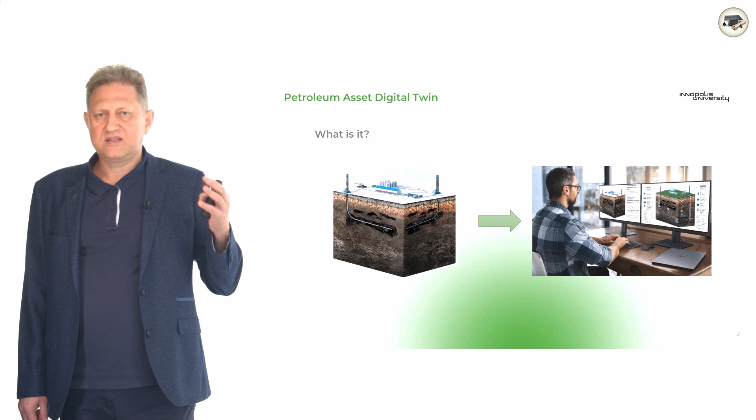So as you can see from that picture, the picture to the left shows you a kind of a screenshot of what happens in real life, whereas to the right you see a person sitting at the computer monitor and watching the representation or a mirror of what happens in real life. And that's what we call a digital twin. And what are the components of the digital twin? The pieces of the software which we have to build in order to create that integrated facility.

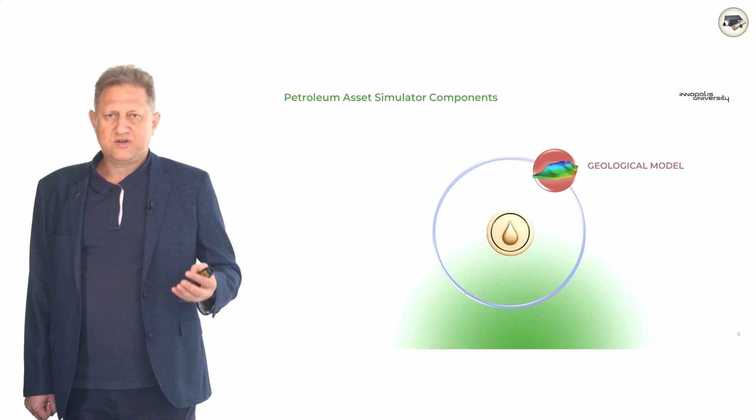And the first component obviously is the geological model of the reserves, how they have been created, matured, and located in that place. And then we go to the dynamic flow model, because if you want to recover these reserves, you have to force the fluid to flow from the pore area into the wells. And then you go to the well model. You have to model the way the fluid moves through the well, whether it's up from the subsurface to the surface, or sometimes petroleum engineers do the injection of gas and water back into the reservoir.

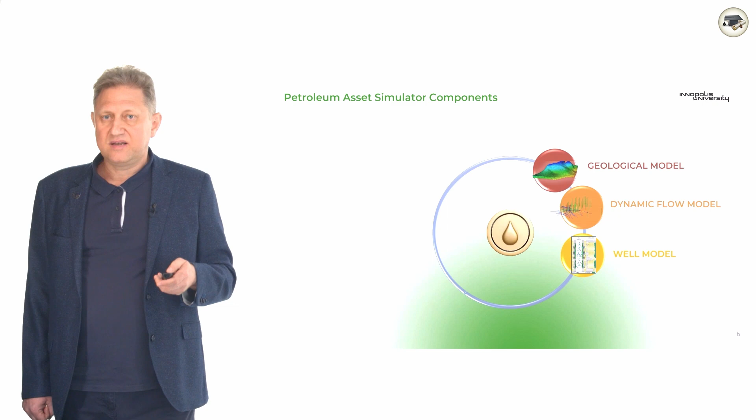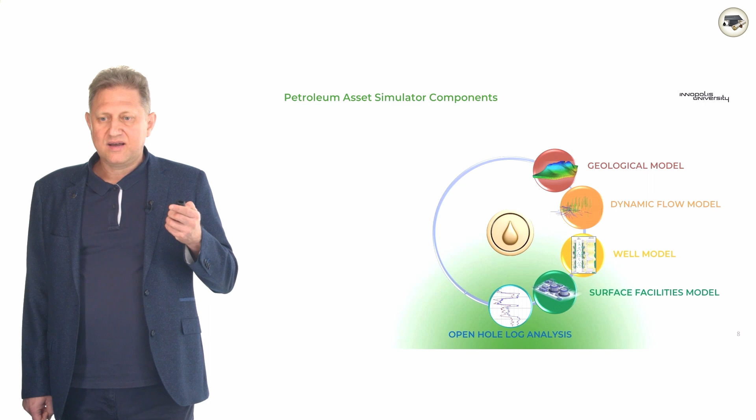And the next one is the surface facilities, which, as suggested by the name, stay on the surface and transport the fluids, water, oil, and gas towards the processing plants. And when you run that business in petroleum industry, you have to start retrieving the data about the rocks, about the wells, about the surface facilities. You definitely go for the surveillance. And one of the key surveillance methods in petroleum industry is the open hole log analysis, and that component should be put into the computer space as well.

And once you already have the wells, and you understand the rocks to some extent, you have to start understanding the performance of the well itself. The wells, just like people, tend to be misbehaving. They have integrity issues, they have performance issues, and you have to run the surveillance to understand what's going on with this well. And that has to become a part of the digital asset as well. So that's called a cased hole log analysis.

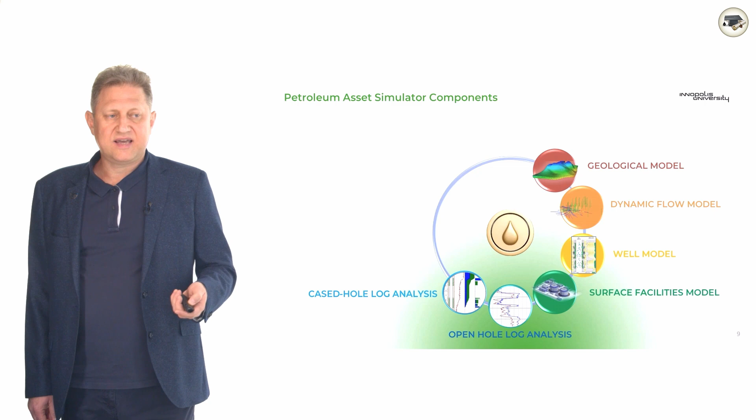The other popular surveillance in the petroleum industry is the pressure and rate transient analysis, where people analyze how the production is changing over time and how it relates to the changes of the pressure over time. So those two constitute what is called a pressure rate transient analysis, a very important surveillance mechanism to understand the reservoir and well behavior.

The other component of any digital twin, not only the petroleum assets, but basically any digital twin, at least those who try to mirror the business processes, is the economics, which includes the ins and outs. And we're going to talk about this a little bit later.

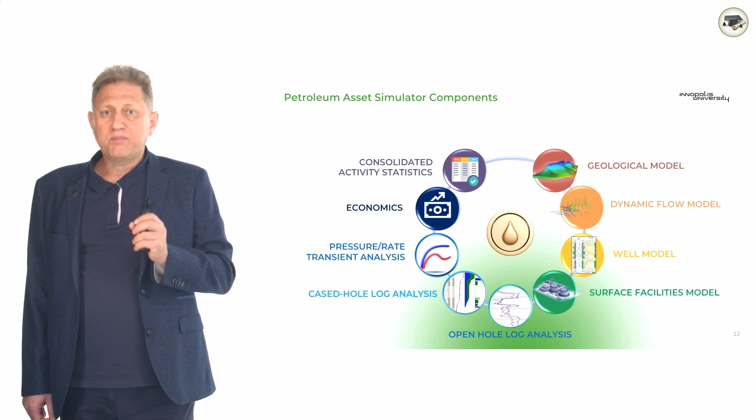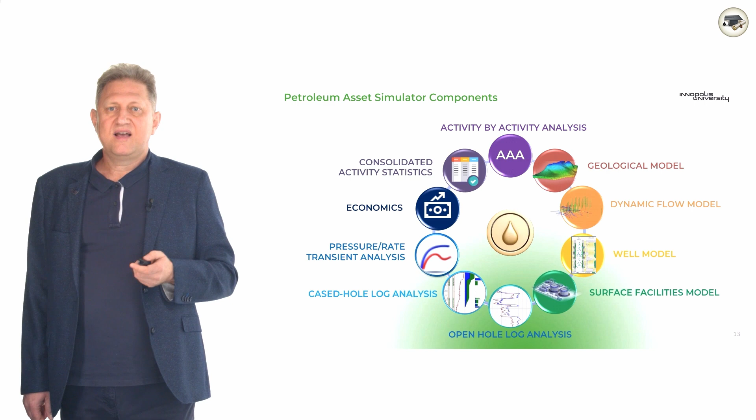The other component of the digital twins is consolidated statistics. So the robots today keep tracking what's going on, and they bring the numbers to the screen so that people can analyze these numbers and understand what's going on. And this kind of monitoring statistics is normally split into two categories. One is the consolidated, just the numbers, and the other one is something which has a visual representation, like graphs or maps, and that one we call the activity by activity analysis. So those components are constituent parts of the digital twin.

Now let's go see very briefly what's inside. Well, definitely, we don't have enough time to go into the foundations of petroleum engineering. That's going to take hours, if not days, if not weeks. But what we're going to do here is show you the pictures, the images which are associated with the components I just previously described. So when you say geological model, we normally see the cross sections of the different subsurface stratums. We see the maps. That's what we say the geological model is.

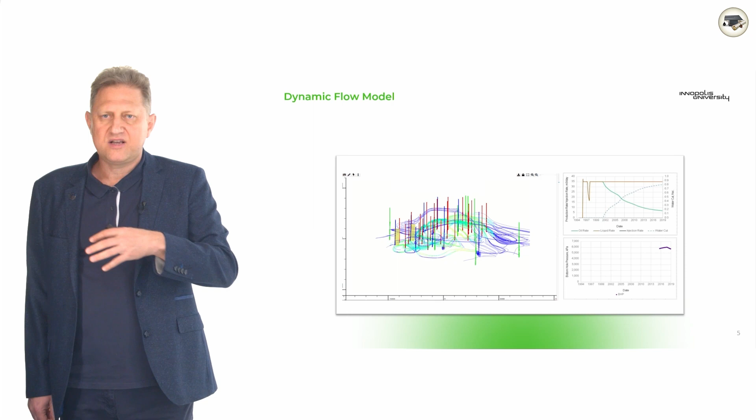The other one is the dynamic flow model, and what we see is the streamlines of fluid, which is moving from one area of the 3D reservoir towards the wells, or away from the wells if this is an injecting well. And the other one is the well model. What is the picture associated with the well model? It's a hole in the ground and a pipe within the hole, and we can see that there is a perforation which connects the well with the reservoir, and we can see the fluids, in this particular case pictured like bubbles. They're moving either from the reservoir through the perforations into the well and then lifting up, or they are moving down because we pump them from the surface and want them to get into the reservoir.

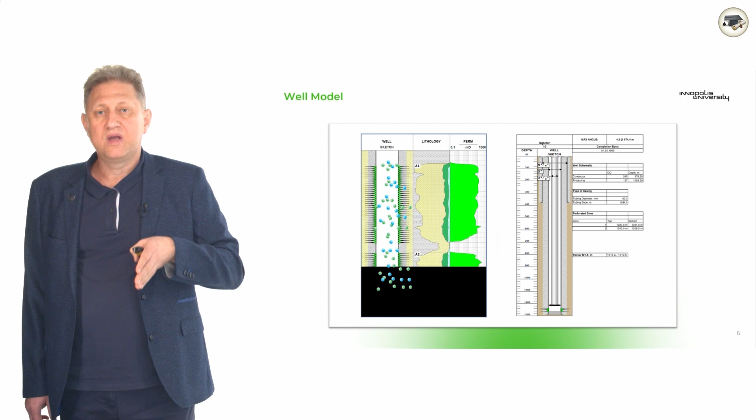The other one is the surface facility model, and it's easier to comprehend for the majority of people. It's like a small plant. Well, I cannot say small, it's quite big actually, but it's basically spread over the area. So each of the components of the surface facilities in the conventional oil and gas field are not really huge, like the downstream processing plants, for example, but there are a lot of them, and they are distributed over large areas. They are connected by pipes. There are processing plants. There are pipes, chokes, valves, and every single thing is being modeled and put into the computer space.

So creating a kind of a butterfly effect. You can change the choke size in just one node of that surface facility, and then it will change everything, the flow from the particular well or the group of wells, and it will impact the economics. Everything will be calculated in the computer space automatically and very quickly, by the way.

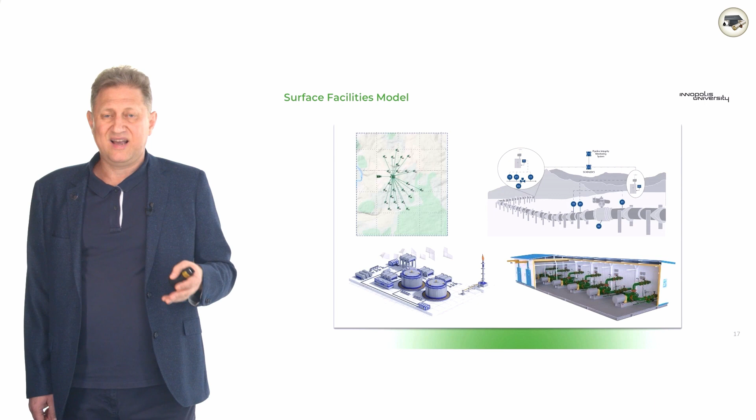And the next one is the open hole simulator. When we say open hole simulator, we mean that the well was drilled. The petroleum engineers put the tools in; the modern open hole tools are kind of computers with a lot of sensors which try to sense what's going on in the reservoir, what its porosity and permeability are, what type of fluid is in it. And normally, this is the picture we see on the screen when we talk about open hole simulations. Behind every single sensor, there is high-class mathematics.

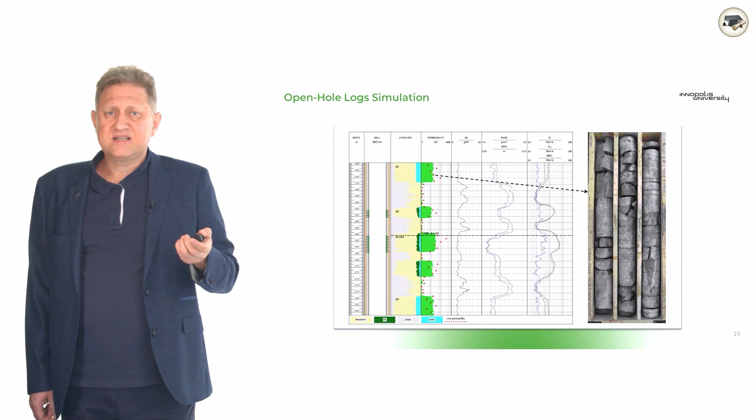If you look at the right, you can see the samples of the core, which have been retrieved from the well during the drilling. And what you can see is that the core looks like a stone, but that stone has a mineral compound, and it has porous space in it. And that porous space is filled with fluids, and the fluids have chemical compounds. So it's a great challenge for petroleum engineers to pull down the tool full of sensors. I mean, we're talking about dozens of sensors.

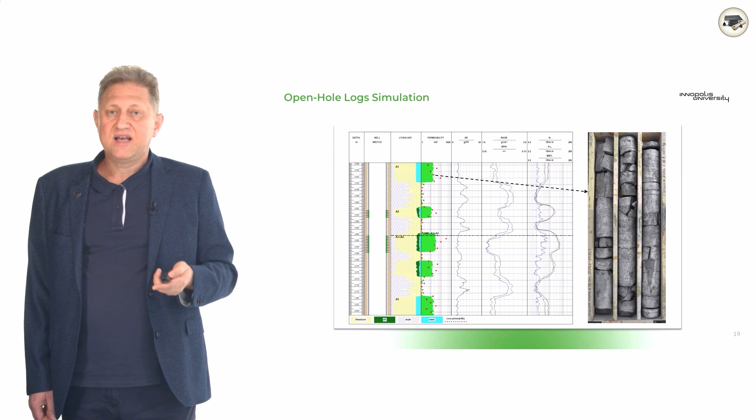And these sensors, they do everything they can do. They emit neutrons, they capture the gammas, they check the temperature, the pressure, the acoustics, electrical resistivity, magnetic response. They try to do everything that physics knows in order to understand the behavior of the rocks, to characterize the rocks, and to match the sensors to the cores which have been retrieved and studied in the laboratory. So everything you just said is being modeled and put into the digital twin.

The next one is the cased hole simulator. That's already a later episode of the well when it's been completed, and the steel pipes have been run down, so you don't have direct access to the reservoir and rocks anymore. But what you want to understand is the performance of the rocks behind the steel, and that uses different types of physics and sensors to do that. And you want to understand the integrity of what we call a completion.

Actually, the modern wells are not just a hole in the ground. If you look down through the pipe, which is many kilometers, by the way, sometimes horizontal, inside of that well it's a whole building. There are so many steel, rubber and plastic facilities in it, all types of materials you can find, ceramics. It's a very complicated structure inside of that hole. So basically, it needs to be monitored and assessed to understand if it works properly. So everything is being simulated in the digital twin.

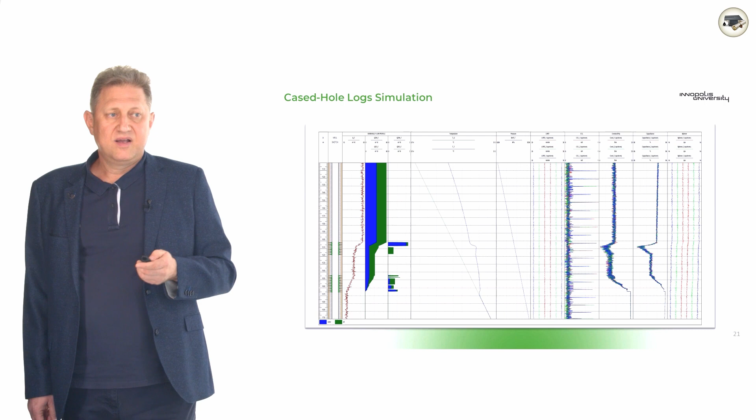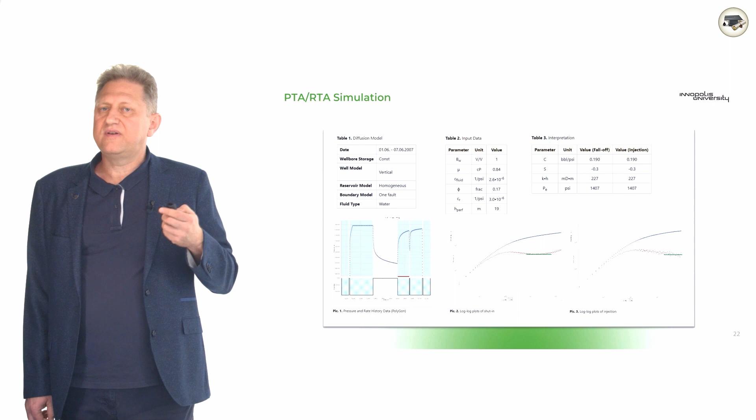And then we go for the pressure transient analysis simulation. It's probably one of the earliest ways of surveying and understanding the rocks and the well behavior, the contact between the well and the rocks. Normally we see pictures like this, dual logarithmic plots; understanding the pressure against the flow rate changes has also been put into the digital twin.

And obviously the economics, which, as I said before, splits into two halves. One is what we put as the input to the economics: obviously the price of the fluids which we recover and sell, the costs associated with running the business, the fixed costs, the operational costs, the capital cost, everything, the taxes, all kinds of expenses which you normally find in the financial statements. They are all put as the input into the professional financial model.

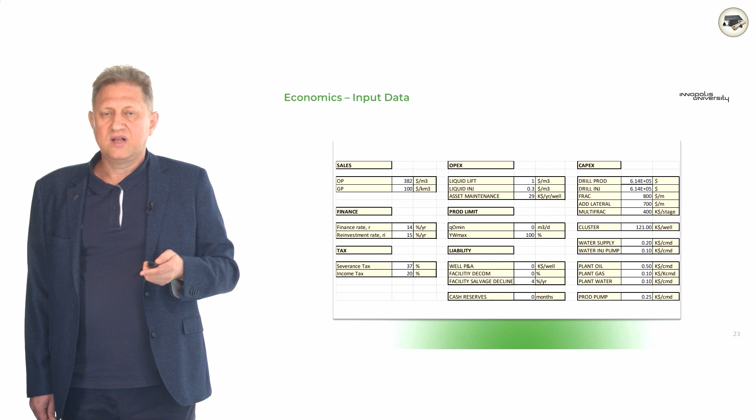And the other one is the economics output data. That's probably the biggest concern for the investors or the top managers of the company who make a decision to invest cash into the development of the facility. Probably drill more wells, do the workovers, build up or upgrade the current facilities, or sometimes just sell the asset to someone else. And that needs another type of economic study. It's called investment modeling.

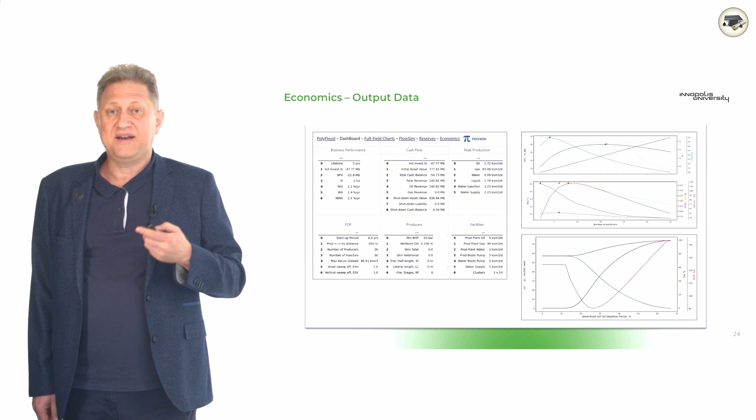And in the digital twins which we run in NAFT College, we put, if not all, at least the majority of the popular investment metrics into the digital twin, including the NPV, profitability index with the account of the discount rate, return on investment, the IRRs, the modified IRRs. There's a large set of investment metrics, which the majority of investment and financial people understand, in order to make a proper decision on which way to go.

And the activity by activity analysis. Sometimes the strategies of two scenarios could be quite close, but the performance can still be very different, even if the strategy is similar. In this case, we have to acknowledge that the real asset and its digital twin are really complex. They are highly complex, and we cannot come up with the ultimate scenario without looking into the inhomogeneities of how reserves are distributed. In this case, we have to scrutinize every scenario with activity by activity analysis.

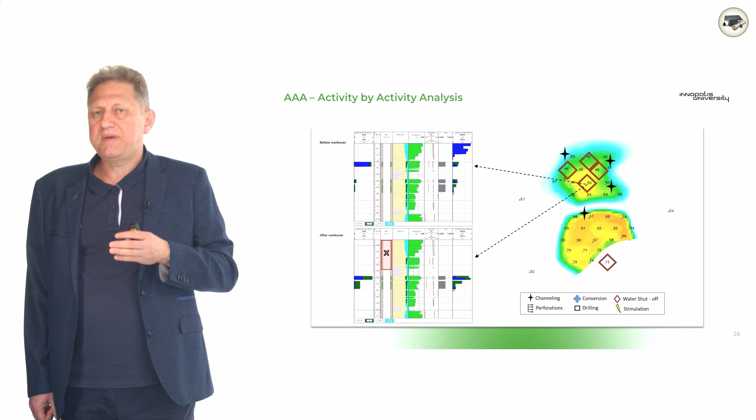And that's how the digital twin is creating the pictures. You can see them to the right. You can see the typical pictures of the activity by activity analysis, which help people to understand or refine the scenario.

Now, I think we finished with the digital twins, and the next chapter is the digital assistants. What do we understand by the digital assistant? First of all, the border between the digital twins and digital assistant is not so clear. Basically, if we come back to the few slides before, like activity by activity analysis and the consolidated activity statistics, this kind of output from the digital twin can be already considered as the digital assistants, because they assist us in computing these numbers or the pictures or the graphs and bringing them onto the screen.

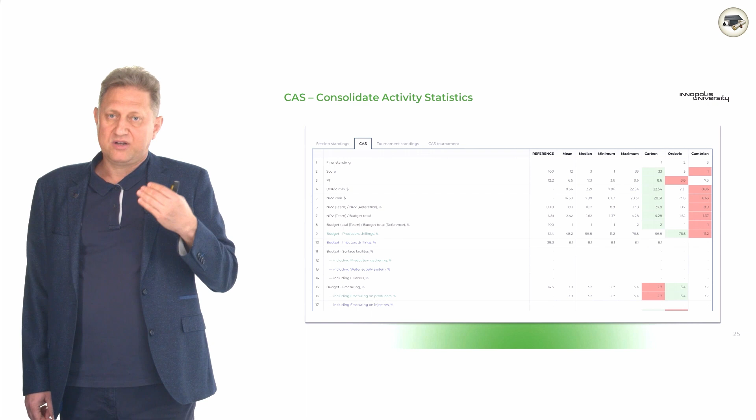Well, yet the digital assistants today is a little bit more than just building the metrics. And many digital assistants today, they have AI components, artificial intelligence components. So they are not only building the numbers or borrow the numbers which have been built by the digital twin. They also provide the automated analysis of this data, and they come up with the robotized vision of what's going on with reserves, with the well, with the facilities. They do provide recommendations, but they really assist in understanding of the performance and the status of the reserves.

Normally in real life, when a real petroleum engineer is using the digital assistant, it's relying on its advice. But the ultimate decision on the analysis is made by a human, because quite often they factor in a lot of the non-systematic factors which the digital assistants cannot take in. So basically, it's not like the people are smarter than digital assistants, which, by the way, they are. But the point is that sometimes people have more information compared to the current version of the digital assistant, which can only take that amount of information, and doesn't understand any extra information.

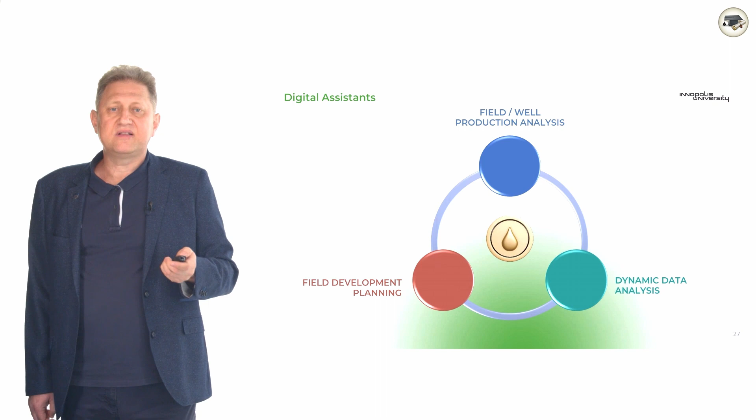So if you go to the field production analysis, those are the pictures which are normally associated with understanding of the status of the reserves, layer by layer, the performance, the integral performance, and the automated suggestions from the digital assistants on what possibly happens here. Do we have thief water production? Do we have thief water injection? Do we have inhomogeneous performance? Is it matching the expectations which we have from the master development project, or it exceeds expectations or goes beyond the schedule? That's the kind of things which we normally expect from the digital assistant to do.

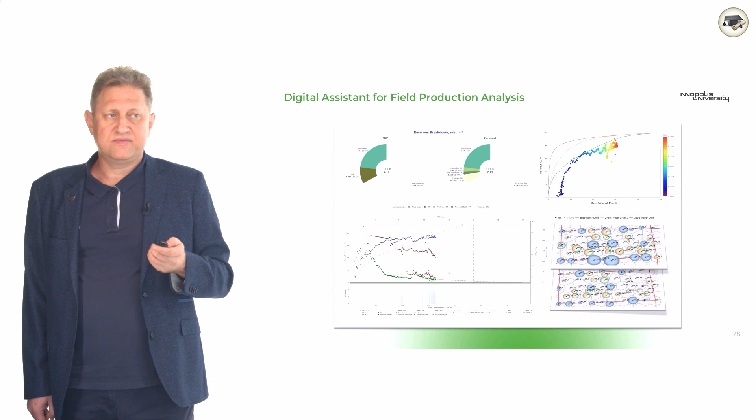The next one is the well production analysis. In this case, we focus on single well, well by well, and we try to understand the performance of that well. Does it perform properly as expected? Are there any integrity issues? Is there any hidden potential which was not revealed in the beginning when we understood that well and we modeled that well, but based on its exceedingly good performance, we see that we overlooked the amount of the reserves, the energy of the reserves around that well, and we can come back and amend it.

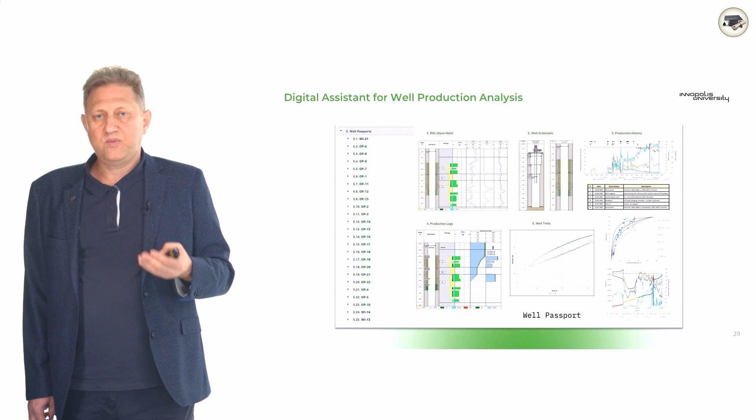So the next one is the dynamic data analysis. That's another important digital assistant. We've been talking before about the rate transient analysis and pressure transient analysis. Those are the facilities which simulate, but this facility analyzes the results of the simulations, compares against the expectation, and comes up with advice on the potential cross-well connectivity or the drainage area around the well, or the well performance itself. Those are very important analyses which are normally done by people. They need a lot of training.

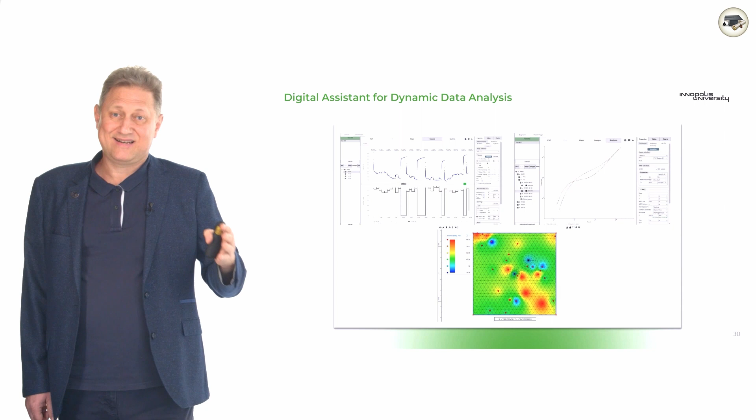So basically all the training we have had in the past 70 years is currently being put into the artificial intelligence to help us at least to pick up the obvious misperformances or obvious potentials. So the amount of effort the analyst has to put into manual processing or manual analysis today becomes really, really less compared to what has been done even 10, 20 years ago. And of course, the field development planning.

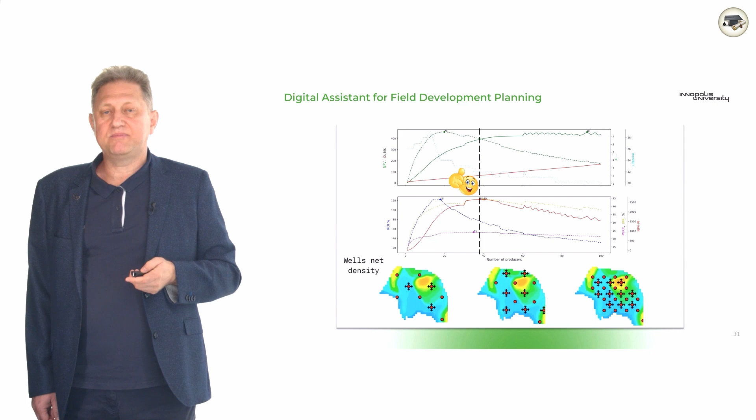So a human who is running that facility can look at these graphs and see either a perfect solution, when all financial metrics meet at one point, or at least a short list of the opportunities which that digital assistant helps him to zoom in on. Well, I think I covered the digital assistants enough.

And the next question is, what is the digital consultant? That term recently appeared as something different from the digital assistant. And I totally agree with that, because the digital consultant is not just an assistant in the analysis, but another smart guy who analyzes the results of the digital assistants, which are based on the digital twins, and tries to come up with recommendations and suggestions. So basically, it's like a human. It's like a GPT bot across from you.

So when you talk to the digital consultant, you actually ask him questions. We also call them bots. So you ask questions to the bots. What do you think is going on? What do you think are the strategic problems of that particular asset? Which particular scenarios do you think are the best to carry on? And that digital consultant answers you in textual form. It can send you digital pictures as well. And you actually converse with him.

You can actually deviate from what he says. You can tell him that you disagree, or you can ask him to take into account information which you believe he overlooked. He or she or it, it doesn't matter, it's a bot. And the bot today can have any face. It could be a woman's face, a man's face, a robot face. It's up to you. So basically, it's the brain that is important in this case. And if we manage to create a bot which is of value to a human, it helps the human analyze the petroleum asset and come up with investment scenarios.